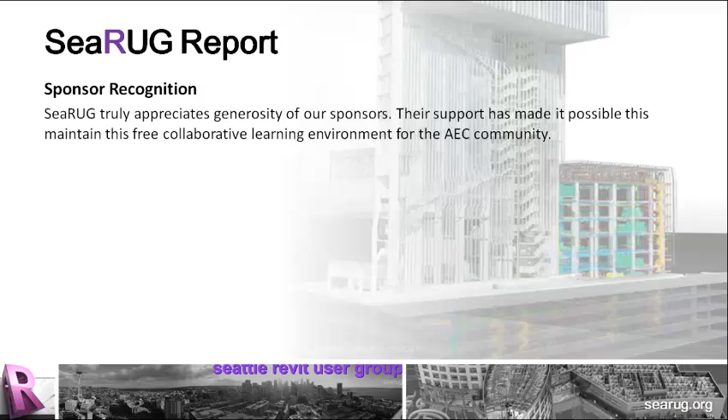How's everybody doing? Good. Does everybody know who PPI is? Show your hands. Now, who's had a presentation with me before? Show of hands. Okay, because you're going to hear this word a lot, show of hands, today. That's pretty much my presentations. Can we get the front lights dimmed just a little bit more?

Excellent. So here's a couple little brag points about PPI. One of the things that we do have is what we call a Revit briefcase. Last time I was here, I kind of demoed a Revit briefcase, which is a bunch of little tools in Revit. We do have a new release of that, and if you want to check out the new stuff, you can go to our website and just watch the video of the new release. I'm not going to show that here today.

Who's using release 13 right now? Show of hands. Anybody using release 12 or below? A couple folks. Okay. Now, Rob talked about 14. 14 is shipping, so the 3 flavors all by themselves are actually shipping. I think it shipped last week. So you can download those if you wish. But the suites are not. The suites were supposed to come out the 12th, so figure in the next couple weeks we'll see those as well.

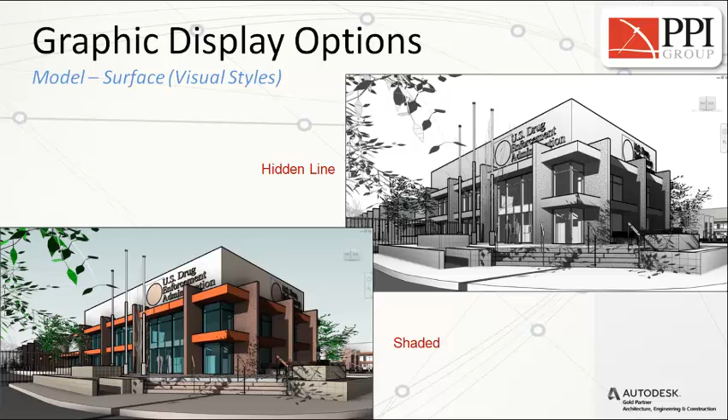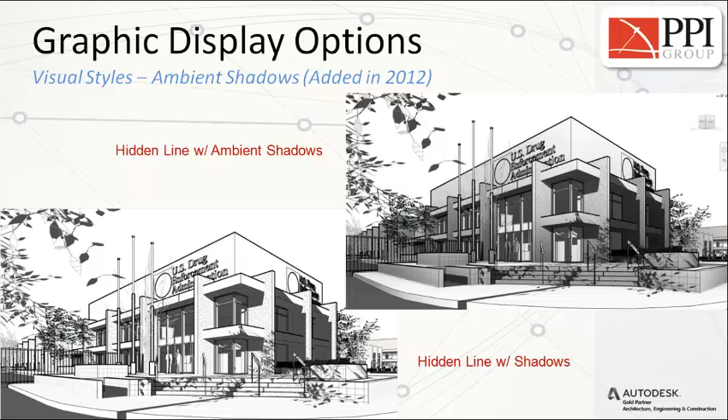Visual styles, hidden lines, shaded views, realistic, rendering. So in the realistic or the visual styles, we actually have ray tracing, which was a 13 tool. How many people here are using the ray trace tool right now? Okay, not a lot. Okay. But we also have ambient shadows. Shadows by themselves, but also ambient shadows are inside there as well. How many people are using ambient shadows? All right, so new to 13, we have the ability to apply background images to elevations and sections.

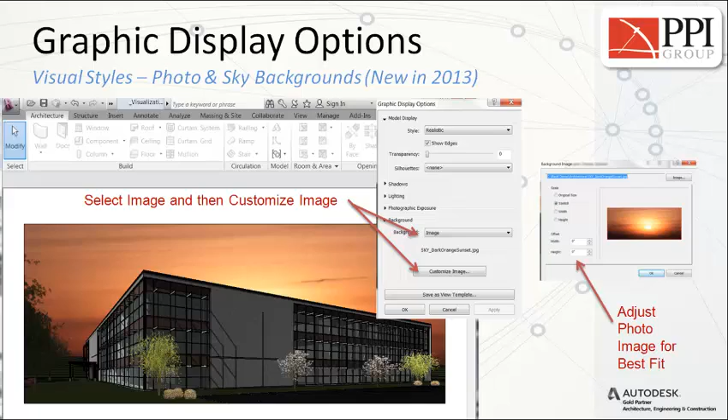But we also have the ability to add images to those as well. There's a couple little things in 14 that I noticed about the images, that when we go off and place them, if we tweak the image a bit and we want to go back and tweak it, we've got to remove the image and basically do it again. So I don't know if that was a 13 thing, but definitely in 14, it caught me a couple times during my presentation. Let's talk about shadows and lighting. Do you guys like that picture?

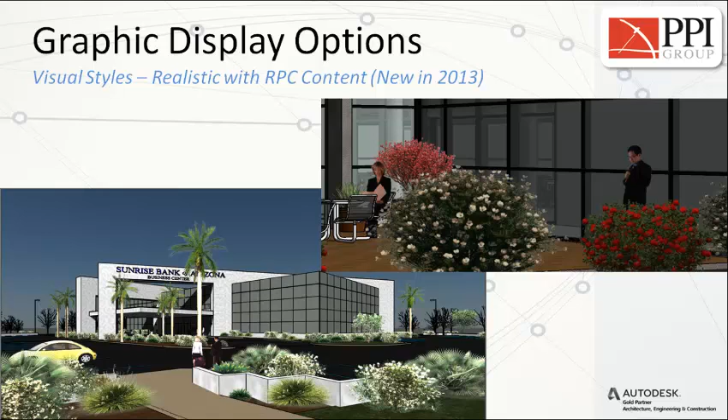In the 2013 version, any of your RPCs are now rendered in realistic. Realistic is a pick of a button and a couple seconds versus a render. Very powerful.

All right, let me show you some things. This is 14, as he mentioned, the big R.

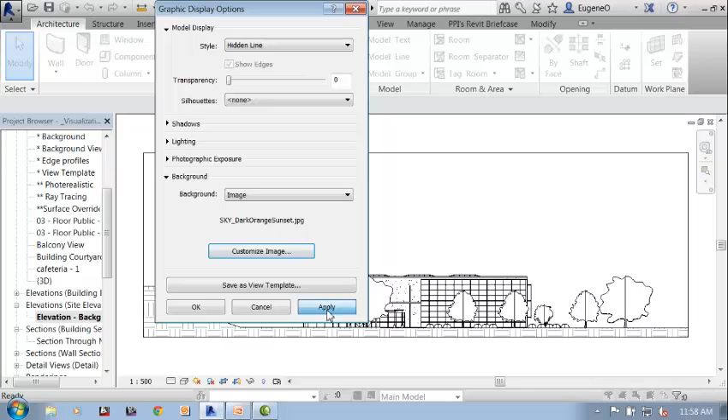All right, so background images. If I go down to my visual styles and hit the graphic display options, we have background images. I can say that I want to grab an image. Let's customize the image, let's go grab the image, let's grab the orange sunset here. And then when I say OK, I can go off and apply that, and there's that image to an elevation.

And then I can just quickly say, you know what, I want to go realistic to that as well. There's your seconds - pretty quickly to get our trees, to get the shadows and all that stuff automatically set up. How quick was that? Quick.

All right, let's take it a step further here. How many people have dealt with and played with these options here? Show of hands. That's good, that's good. So first off, you got your visual styles - which one do you want? I'm going to go and say I want realistic for this.

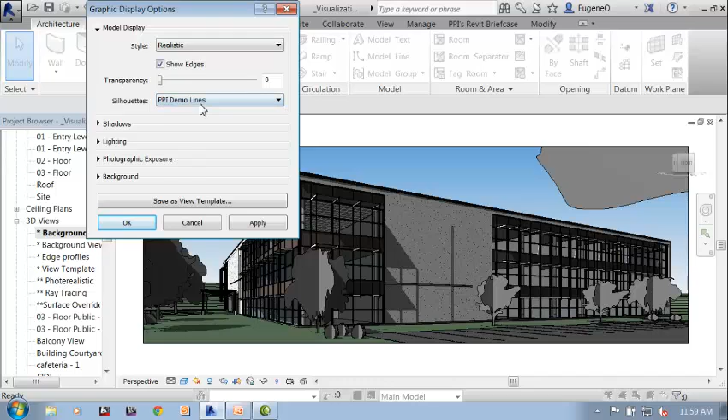And then there's those edges right there automatically turned on, and here's our silhouettes - which one do you want? I'm going to make it really ugly with our PPI demo lines to start off with. I'm going to go and say apply. And we're going to get some really pinkish things happening, just so you can actually see in the back row - but that's applying those profile lines.

So you think about what kind of line weights do you want to assign to these edges, and you can apply that by creating a line style.

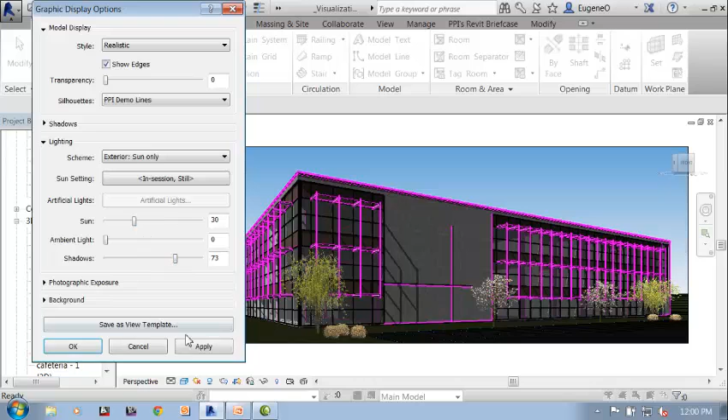And then we can drop it down to the next step here and go to shadows - there's your casting shadows and there's your ambient shadows. If we do have shadows, I'm going to go and change my lighting here. So let me pop up there and say I got shadows go on. There's my lighting, and you can kind of see the shadow right there. I'm going to say, you know what, let's boost that up a little bit, let's apply that. So really what you're doing is you're adjusting these lights to get your look and feel.

And of course you can play with this all day long, right, to get there. And then once you have that, then you just go down to the next thing.

There's photographic exposure - this is something that we got in 13, before we had to do it in render, and all you get is the render tools. So I'll make sure to turn it on with an automatic feature. I'm going to go ahead and say let's apply that - kind of washes it out a little bit more, kind of brightens it up. And then I can go off and do a manual tweak to it.

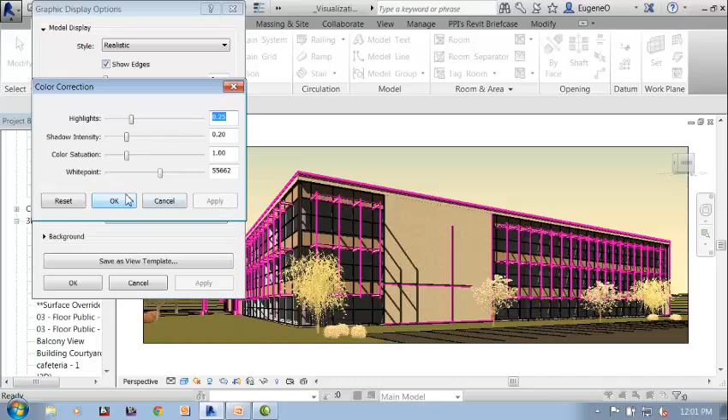Or I can go in and do some color correction, like I really want it to be a yellow instead of a white. Cool, so again we're just playing with these things. Once we have these done, we can go again and throw in a background image.

Let's go to a different one here. I'm stretching that one, that looks good. And let's apply it. And there it is.

So now what I've done is set up a view that I kind of like - not really, but I kind of like. And once I have this tweaked, what can I do? I can create a view template of this. So all I have to do is just click onto it, give it a name, and OK it.

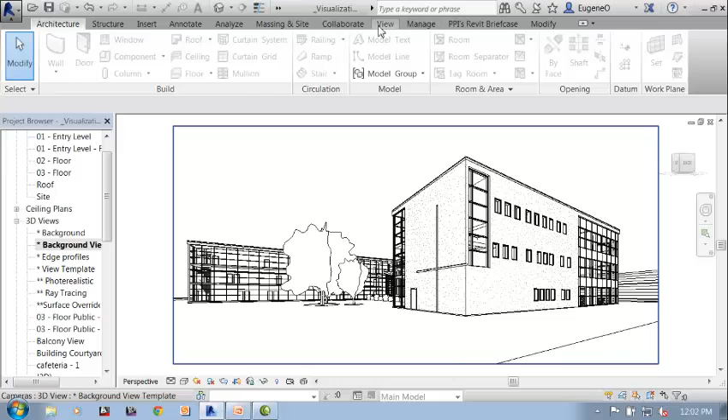And then I can go to another view and I can apply that template to this view. Simply by going over to the View tab, saying Apply Template, grabbing my template, and applying my template. Not really great with the sun, but we're going to talk about temporary templates a bit later on today.

For those people who are using 13 and View templates, do you like them? Okay, some people do, some people don't.

The thing about View templates in 13 is once you applied it, it's locked, if you assigned it to the view. So right now it's not assigned, I just said apply this template. If I go look over my buttons here, I can change any of these little buttons—oops, wrong button, I want that back on.

I can change my path and say, let's look at this at maybe 10 o'clock in the morning. Notice the actual shadow changed, but I applied a template to it.

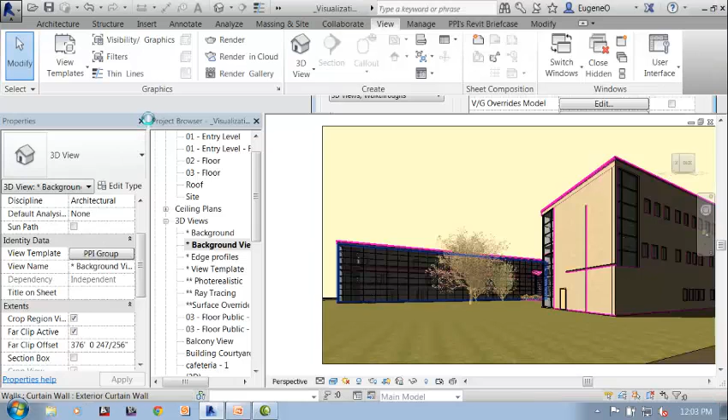Now if I go over to my properties window, which I turned off for the screen size, there is no view template assigned. If I assign this view template, what I'm basically telling it is I'm locking that information down.

Went back, shadow went back, and then these buttons are pretty much grayed out now. I'm not really allowed to go change these buttons. That's a view template. All my little buttons there. Here we go.

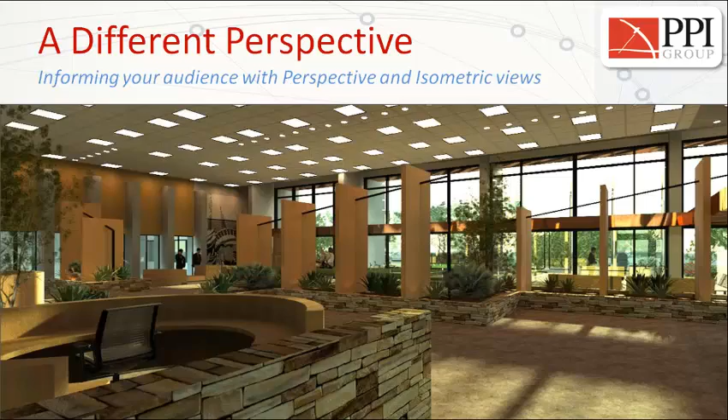Different perspective—I'm not talking about just camera views, I'm talking about isometrics as well. How do I do this in Revit? Not the animation, creating those types of views. Anybody? Not Chris. Section boxes, okay?

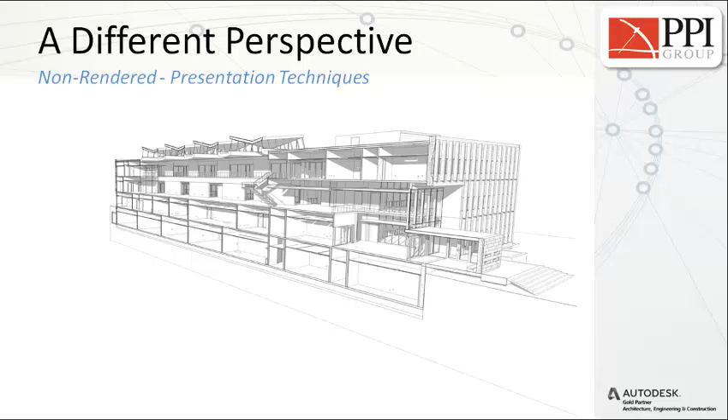So who knows how to manipulate a section box? That's a tough word for my Irish tongue. Okay.

How about orient to a view? Basically what we're doing is cutting a section in this case and orienting an isometric view to that. In the 13 versions, if we lock the view down to new functionality, we could actually tag or label that information. In 2014, we can use material tags now.

When you're creating your images, put yourself in there. How are you—when you walk into this room, what do you want your audience to see? As a presenter, I'm going to be looking up here. As a user, I'm going to be sitting in one of those things, looking down or looking at the projector, right? So think about that.

When you have a balcony, you want to look over the balcony and you want to look at something on the balcony. If you have a residential downtown, a couple of the high rises here, and you're looking out in the city, wouldn't it be nice to have a picture of what that person is seeing? An image of the background, an image of that?

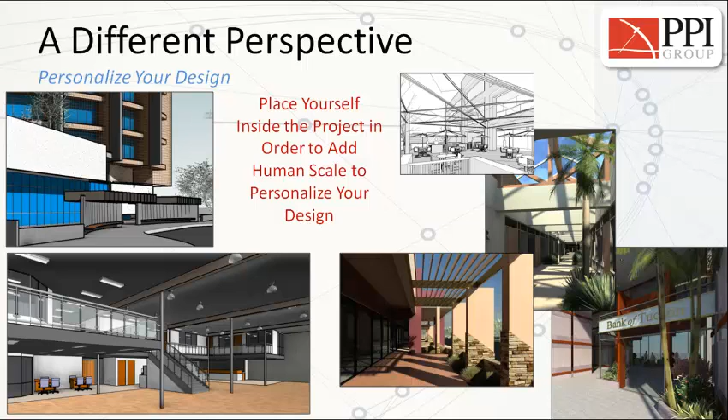When we render, we have the ability to also add images to our renders. Now the projector is not going to do this next one justice, but not a lot of people are doing nighttime renders. But it tells a powerful story.

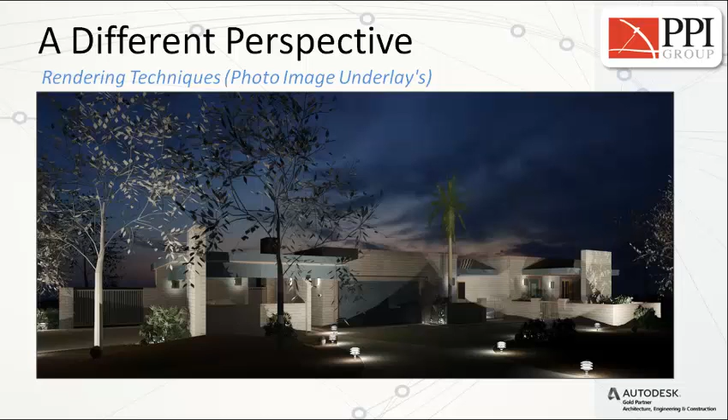Think of this one right here, that one right there. That right there is an image. Just basically somebody went out there, took a snapshot of what's going on in that site, and put that image in the render, or put that image in the elevation, section, or isometric perspective view.

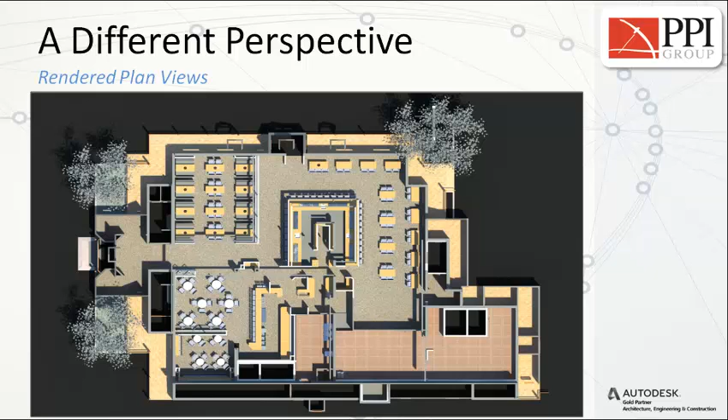Tell that story. How many people here have actually rendered a floor plan? Not a lot. That's a powerful thing right there. Very easy to do.

Gone are the days of our old CAD cover sheets, or at least they should be gone. Okay? Tell a story—that's what that cover sheet's about, right? It's not just information, it's a story, but it's also the image that you want to present.

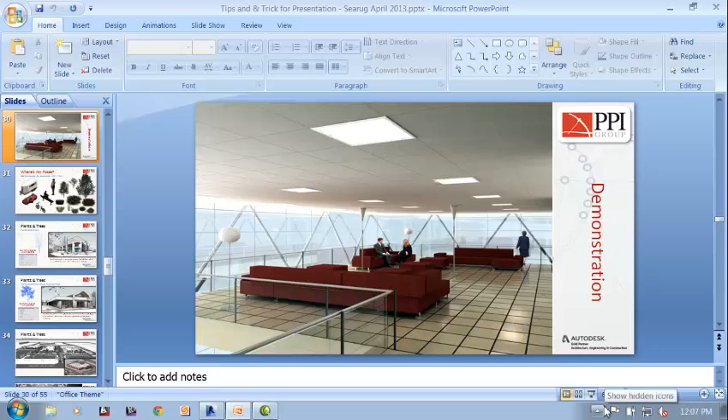Let's start off with that floor plan view. So best practice: start with your doghouse view, which is what I call that right there, the default view, because it looks like a doghouse. Right-click it, save the view, give it a name, give it an appropriate name. 3D Ortho 2 is not a great name, but I'll leave it there.

And then what? You're going to right-click the cube. I'm going to go and say Orient to a view. That's a floor plan view. Which one? I want the ground level.

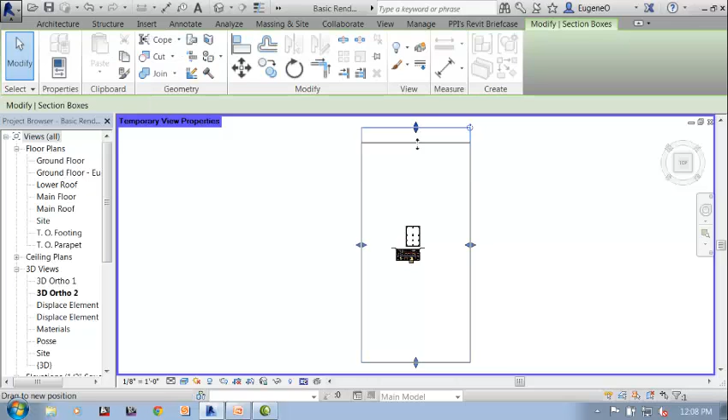There's my start. I also have a view template that I've created, but I'm going to use a 2014 option—it's called a temporary view template, right down in the bottom here. Let's look at this floor plan rendering one. What it's going to do is actually close and hide a whole bunch of stuff, turn on realistic, and then I'm just going to basically crop out my views here.

And there's that floor plan in realistic view. Now again, it's not really giving it good justice on the projection screen versus my screen, because the resolution isn't great on the card that I have here. But what else can I do here?

Come back to here and start playing with my settings, maybe play with my shadow settings. Let's go to lighting for that. Maybe adjust that a little more like that. Maybe get the sun a little higher, lighten it up. So I can start playing around with these.

And I started off with a template, and now I can actually create another template from this. But this is not a render. All I have to do is hit the render button, right?

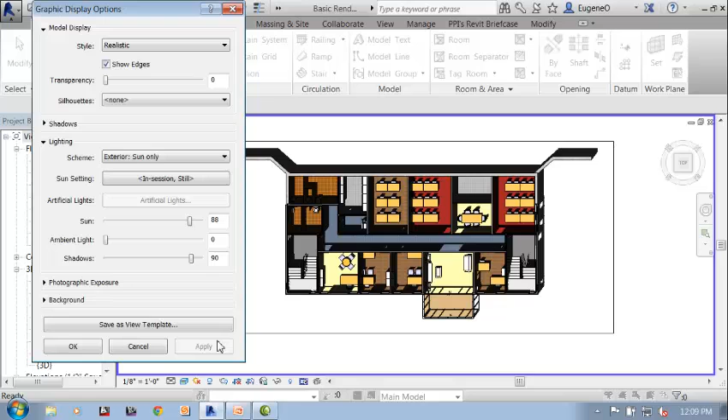Too far. There we go. And I'm just going to go and turn on my ambient shadows. Shadows, let's go and cast some shadows. Let's do ambient.

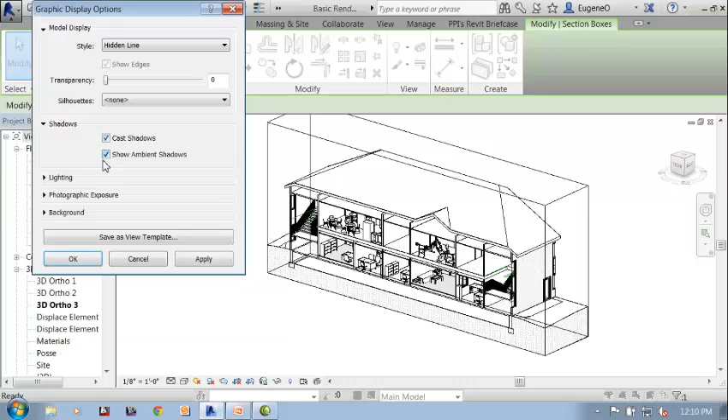I'm not liking that. What's going on there? Let's look at the light. I'm in my session here. Let's go ahead and create a still. Let's grab a predefined still.

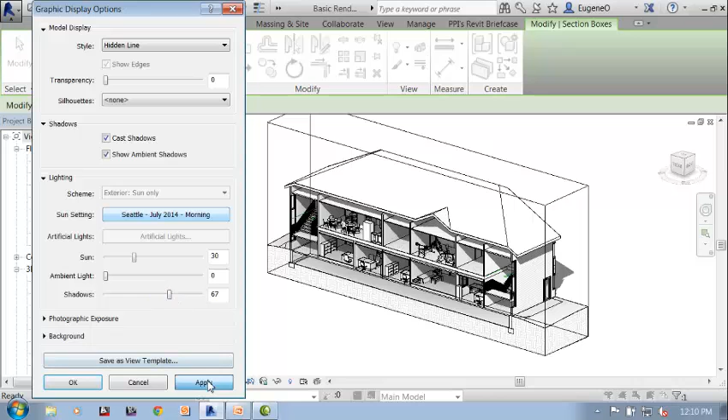That's what I'm talking about. And then start adjusting to your look and feel. Cool? Yes, no? All right.

So how did I create that other image? What did I do? Basically, I just saved this as a snapshot, and then what? Just moved it, saved it again, moved it, saved it again. And then PowerPoint just did the actual play for me.

So if I just go shadows off, is what Rob's asking. So if I go off here and say, you know what, I don't want that, I just want that. There we go.

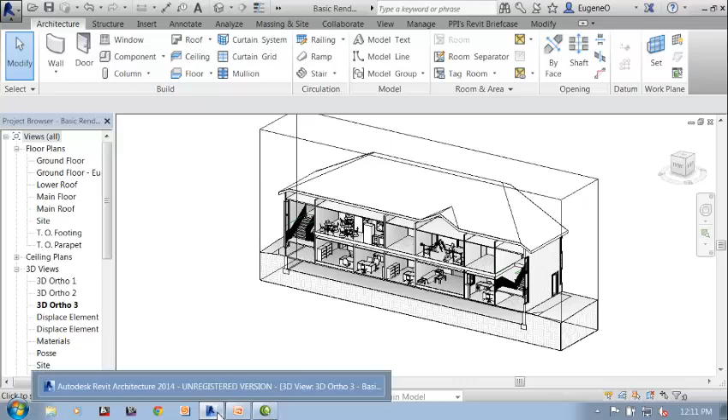All right, by the way, all the pictures, with the exception I think of 4, are rendered in Revit. This is actually like 2008-ish or 9-ish or something, which was AccuRender at the time.

Where's my Posse? Right there, actually. Trees, bushes, cars—this makes the render, not just the materials, but the stuff in there. Just like a photo. If you're taking a photograph, it's all the other stuff that's happening—it's the garbage cans, it's the drapes, it's these other things, right?

Who uses, is it ArchVision? Is that correct? Who's using ArchVision right now? Who's heard of ArchVision right now? Okay, go investigate. ArchVision is basically another product that has RPCs. So it's a product that you can get RPCs from.

I'm going to concentrate on trees because I have limited time. That's a 2009 tree—you guys remember those? Actually, I kind of like the old trees because when you render them, they had different seasons and different stuff. But think about that now—when we are doing these things, we do want to talk about trees that don't have leaves at different times. So when you're rendering, you're not just rendering today, you're rendering the seasons as well.

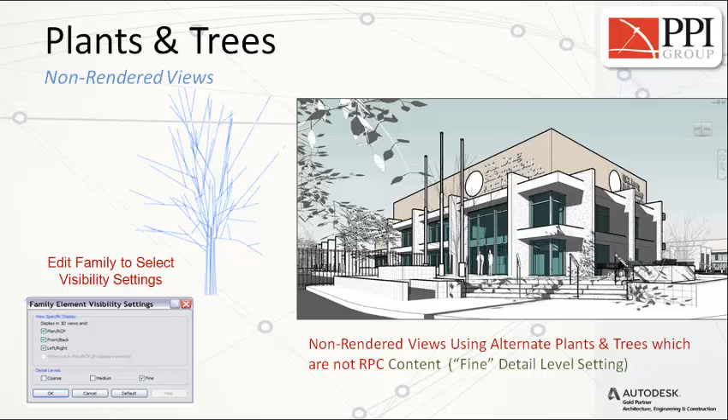But don't forget about trees that actually cast shadows. Go find some of those trees. They may be a little big, but how many trees are you going to have in your view? They may be, but it's going to be worth that casting of the shadow.

When you're looking at your sites, remember to put that stuff in your sites. How do I do the road sign? How did I do that? Somebody said 3D text, right? Model text. Model text. That's all.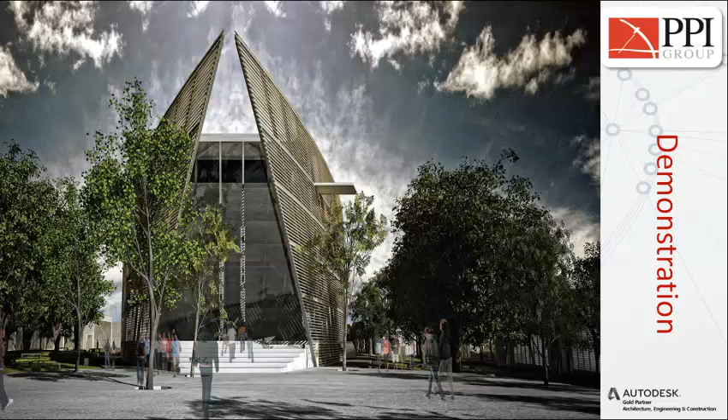That's a 3D Studio Max render. All right.

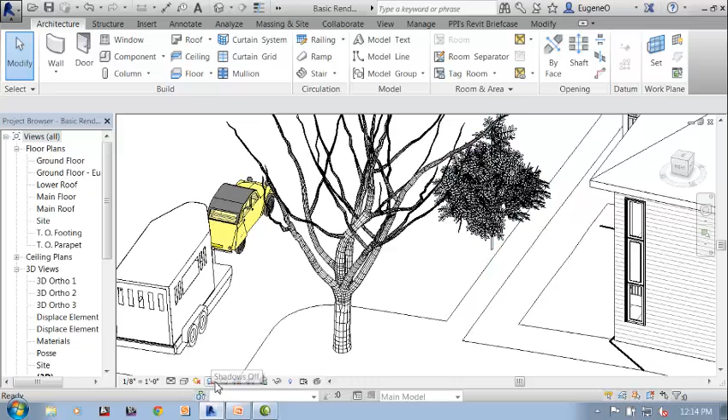Let's take a look at some of these trees here. Pull that one out a little bit. So these are kind of AutoCAD-ish trees, and they actually do render pretty well, and they do cast shadows very well.

We got kind of a creepy looking Halloween thing going on there, right? So that's kind of a dead tree because it doesn't have any leaves, so that'd be great for winter, right? What's that? Yeah, it is kind of hovering, yeah. I just threw it in there last night—I didn't worry about the height and stuff.

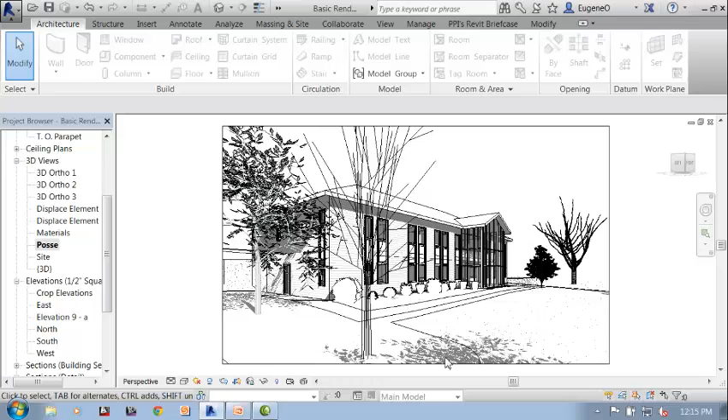So here's another tree, and that's the 2009 tree. If I throw in some shadows right now, you can see I'm getting nice leaf coverage, and there's a tree behind me that's actually shadowing this as well. At this stage of the game, this is pretty good, but let's say I want to boost up this level and add an RPC to this particular tree.

So I'm going to flip over to hit my Edit Family button. I'll grab onto the tree, and in the Properties window—oops, not the tree, the actual view—I want to come down here and say the render appearance is going to be third party. And there it is.

So now what I'm going to do is say this particular one is going to show up in coarse and medium, but not fine. And this one right here is going to show up only in fine. This is stuff we can do with families.

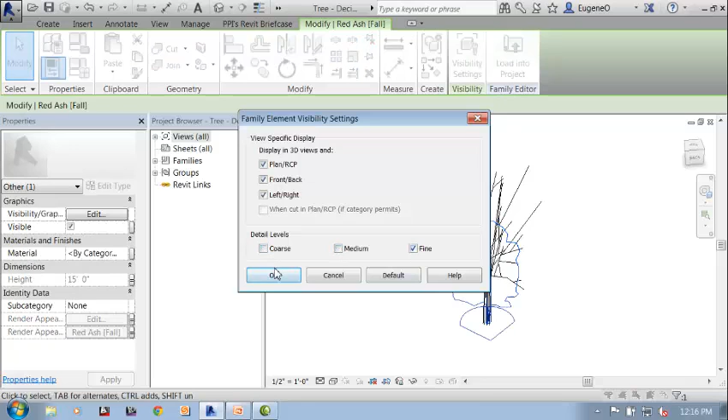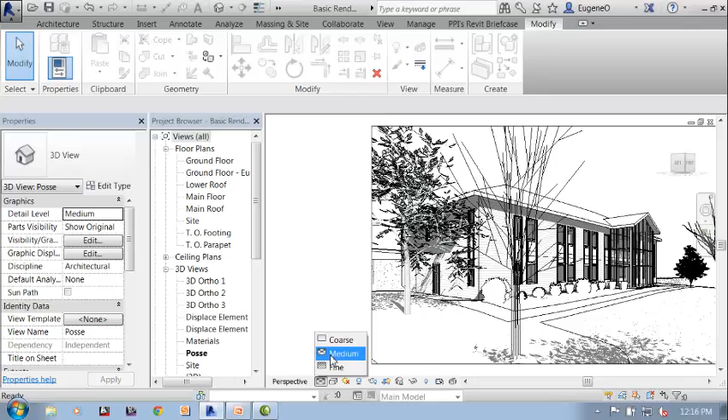Go ahead and I'll load it into my project, overwrite it, go back over to here, close that down. Now at a medium level of detail, this is what I'm seeing. And at a fine level of detail, that's what I'm seeing. And if I go over to realistic now, I will get the pretty picture.

So see what I'm talking about when I talk about staging different times of your renders? Maybe at this stage it needs to look this way, but at the end of the day, end of the project, we're going to have some real pretty pictures.

Everybody's quiet, I'm not hitting any questions. All right, let's close that one down.

This is the fun part for me because you guys get to answer the questions. This is a hidden line view. How do I make the bottom look like the top? And again, Chris can't answer the question.

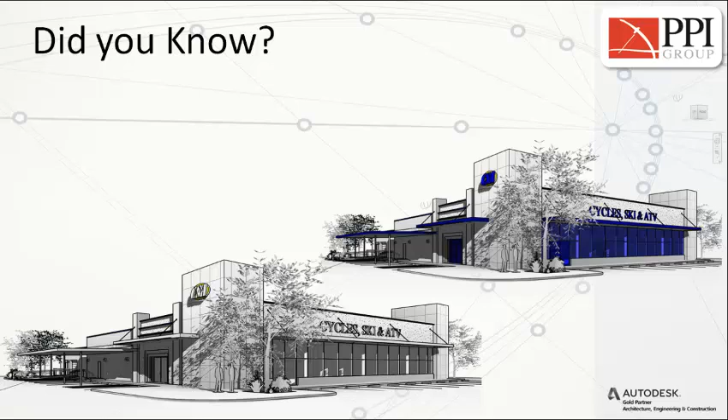Surface override. So basically what I'm doing is overriding a particular feature in a hidden line view.

Let's take that a step further. Here is a typical elevation. But wouldn't it be nice to be able to give it some depth, some texture? Because when I plot that out, I kind of want it to look like that.

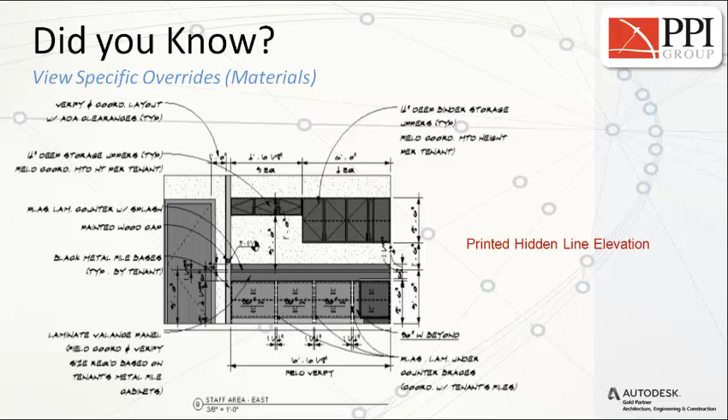I've done some sun today already. So everybody knows about the sun? Sun studies, but we can also do what with it? It's for rendering as well.

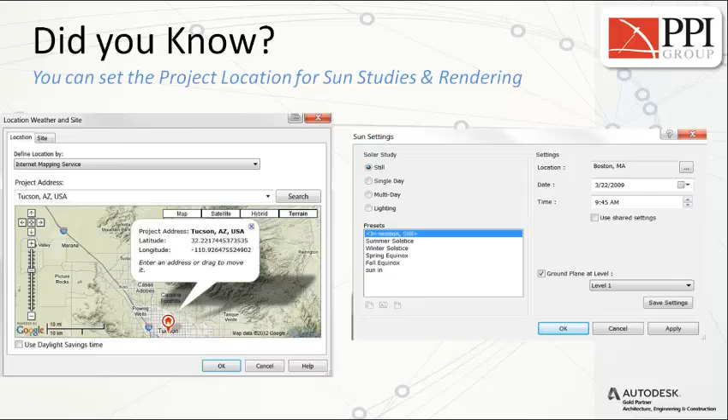What's one of the most important things to make sure is set if you want to get an accurate study and accurate shadows? Location, what else? True north. Where is true north? Who knows how to do that? Okay, I guess I'll show that one.

Think about your sun. This is basically the same camera view rendered 4 ways: sunset, midday, sunrise, and nighttime. All by setting up the sun, and of course in the nighttime, setting up the artificial lighting.

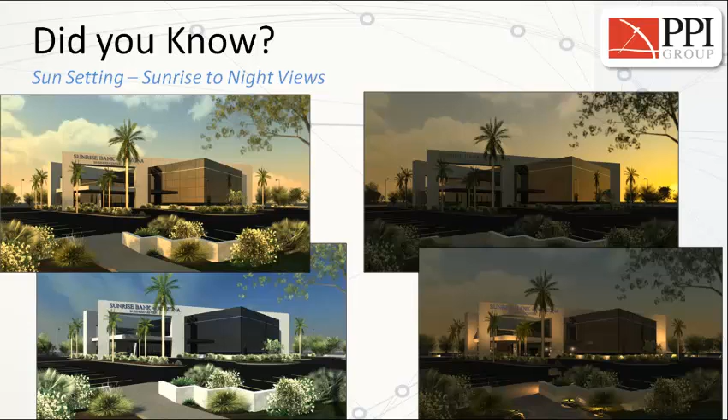Who knows about transparency? Everybody should show their hands on this one—this is like the key one. Good. Who knows how to do that?

Put this on a sheet of paper, and I want to show elevations, and I want to show a gradient fill on a sheet of paper. Two different ways to do that—there's a 12-way, and then there's a 13-way.

Anybody? All right, we'll show it. Rob mentioned render to the cloud—I have a ton of credits.

Okay, now I have a ton of credits because we're an ATC. And as an ATC, we have 50 licenses per site, so I have a lot that we can use. But there's telling you the credits, and I'll go look at the actual maximum image size so we can look at that as well.

But this is something that if you have subscription, utilize it if you have it. Do you want your machine to sit there and take off rendering, walk away, or would you rather it render to the cloud and still use your machine? That's what it's all about.

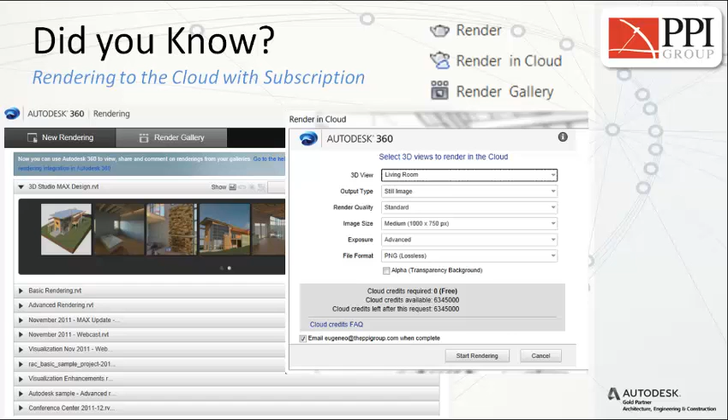So for subscription users, you have this ability. In the 13 version and on the suites, you have this workflow option that I didn't talk about last time I was here because it wasn't shipping at that point in time. And Autodesk promised a one-click thing—it's really like 3-ish or more clicks. But this right here is something I got out of Max.

So Max is not just huge, pretty pictures. This is a 9-click thing in Max.

Now you can go, well Eugene, I can do that in Photoshop. Well, yeah, you can, but this is dynamic. If I change Revit and I do the workflow properly, this will update as well. Can you do that in Photoshop? No. So that's part of the suites, that's part of the idea of the suites. And if you set it up right and you do it right, then it basically is kind of one-clickish once you get done setting it up.

Don't forget about design options with rendering. Here's four different options for the client on that curtain wall system. I can't remember who the client was on this one—I have a PowerPoint that shows all the client names for these pictures. This is huge, a lot of work, but actually the curtain wall itself wasn't a lot of work because they had a bunch of parameters and adaptives and all that good stuff going on. But that tells a story, and they get to choose, right? Hopefully they don't choose A and then five weeks later choose B. Never happens, right? All right.

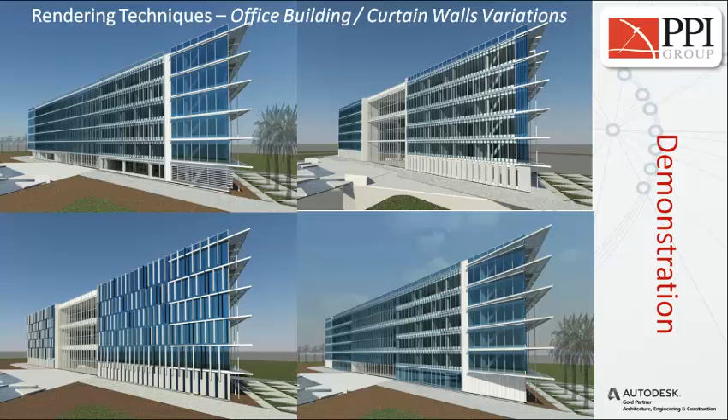All right, let's start with the sun. Probably should bring this up. There we go.

All right, so site plan. In the site plan, what are these right here? Go ahead, Chris. Project base point and survey point. That's very important for where north is, because it's all keying off of where your points are.

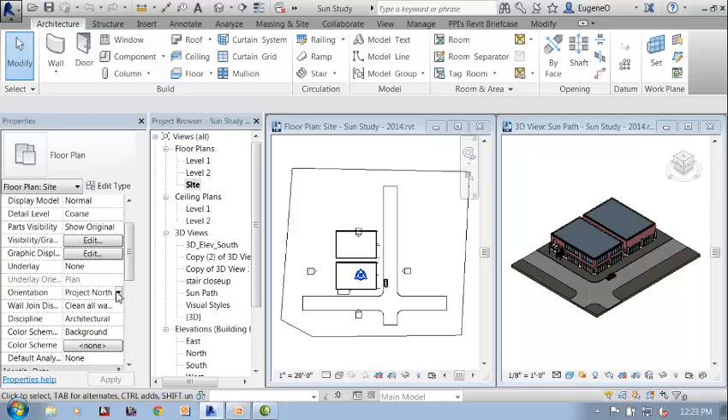So if I come over here and say, well, it's not project north, I want my site to show true north—when I come over here to the Manage tab, I'm allowed to go into my locations and rotate where north is. But before I do that, let's turn on a little shadow here. There we go.

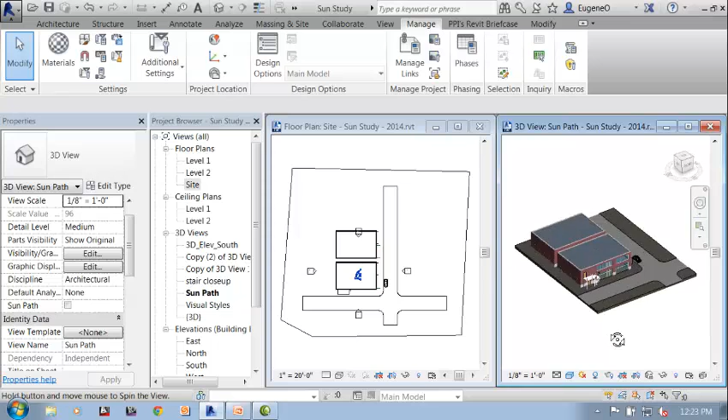I think that shadow's in the background there. So I'll come over here and say I want to change my project north, or rotate true north. See, it's keying off of where that point is, so it's important to first position it. There's north—this is where I want north to be. Notice the shadows are adjusting based upon that. So one of the first things we want to do is figure out where north of our building is, and then we start tweaking it.

The floor plans are not moving because they're set to true north, or project north, which is straight up. So just the site plan is moving around, but anything rendering or showing shadows is casting based upon that north.

This is one of my favorite ones. Basically, if I just want to add a color to something, I'm going to tab to it. Let's get one of those panels there—so we have solid panels and glass panels, and I'm going to override by the category.

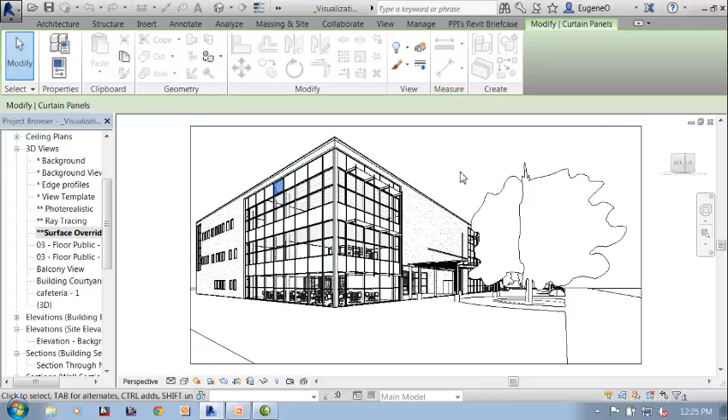So right-click and override, element, category, filter. I'm going to say category, change the surface pattern, get a little darker blue there, and then choose a solid fill for that. Okay.

There it is. So it's a hidden line, but I want to show something a little different versus using shade or consistent colors, which is all the cartoon colors. Here I'm saying I want a cartoon color just for this specific item.

Right? So taking that step and applying it to elevations.

So again, why is this doing that? Anybody have an idea what's going on? I haven't done any overrides or anything—what's happening with my wall? So if I look at the actual properties of the wall...

Coarse scale, there's my pattern. So if I say, well, give it a little darker gray—there's the darker gray. Okay.

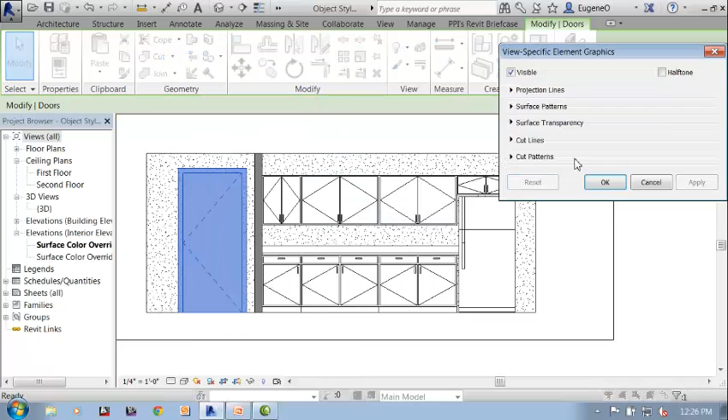And again, I can take, let's say, the door—let's get rid of that—and go ahead and do the override on the door. Oop, not category, let's do it by element. And let's give it kind of a brownish color.

And there's the door. Then I can go into, let's say, visibility graphics and set up some filters for the other stuff. I already set up a filter, but I'm going to show you how to do one here real quickly.

But what I want to do is just go into my colors. Let's say I want a brown, make that solid—let's make this orange, feeling more in a fall mood. Let's give this one a little gray.

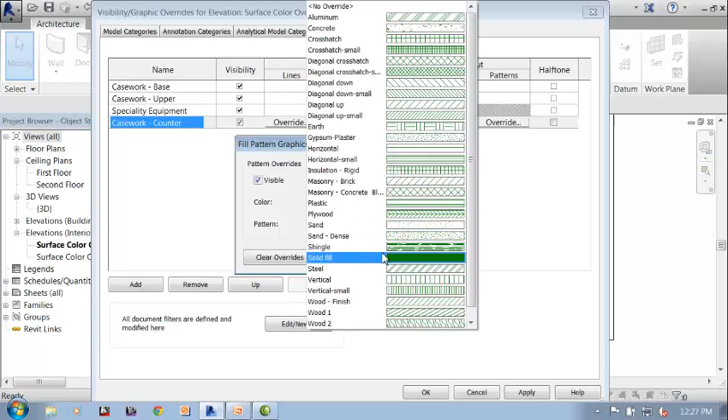And being Irish, let's give it a little green. There we go.

Pretty quick—render that or plot this to halftone, right? Apply this as a view template, or create this as a view template.

So let's come over here. Let's go ahead and say, let's create the template from this one. Okay.

And let's come over here. So right now, if I go off and say let's apply that—why didn't the door change?

Excellent, because I did element, not category. If I would have said category, then the door would have changed as well. But let's say in this case, I want to take the door and the wall and give it a little bit more depth.

Basically give it some more outlines around the actual lines themselves. Now I could do this in visibility graphics, but I want to be able to repeat this, so that would be a filter, right?

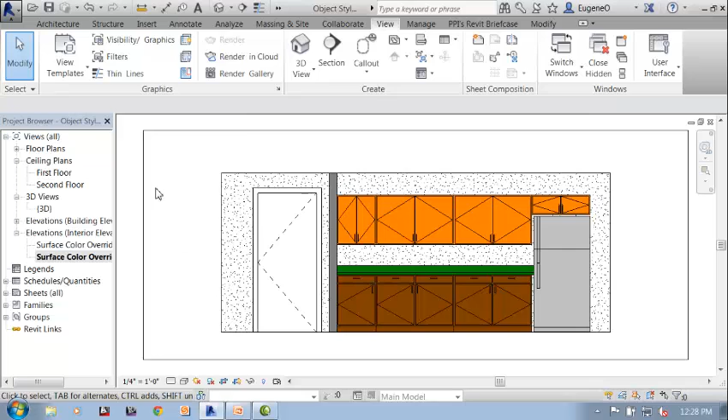Or a template, okay? So let's do a filter. So there's our filters. I'm going to add a filter. What do you want to call it? Or new, and then what do you want to call it? Well, let's keep it Filter 1.

And then I'm using plain Jane Revit architecture, but I still get all of these other options to uncheck. So even though I'm using the suite or not the suite, I still can uncheck those. I'm going to say that this is going to be for doors and walls.

And over here, I'm going to grab a filter by and a parameter, but I haven't created the parameter yet. So I'm going to say, well, let's add a parameter here. And there's none there, so I'm going to add it, and I'll say walls and doors.

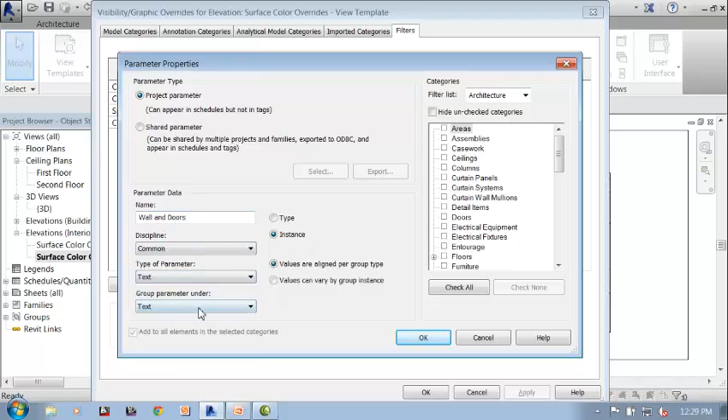I'll make it an instance, put a text, and I'll put it in the other category. And then it's going to be assigned to doors and walls.

Okay, so now what? I want to give the lines a little fatter lines. Oops, wrong side of the box.

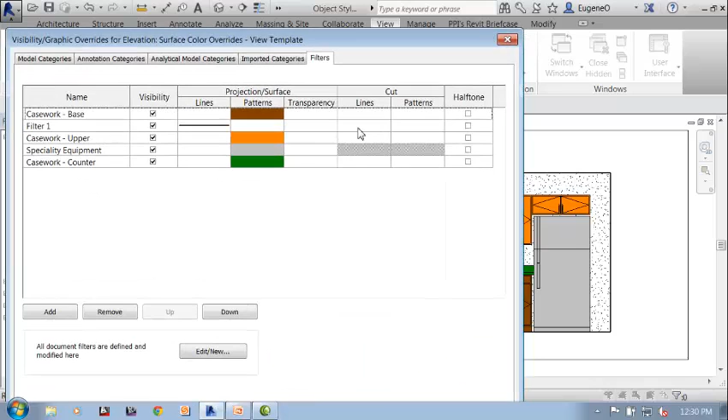When I apply that, what did it do? Give them just those. Now I didn't do that one, so to get the wall, what would I do? Give you a hint. So it's cutting. I'm cutting the wall, so I come over here and add it to the wall.

And now that wall's popping out. That is a filter. And there's a way of assigning, instead of using the silhouette, which you would have done, what? All lines. This is just narrowing down particular types of lines.

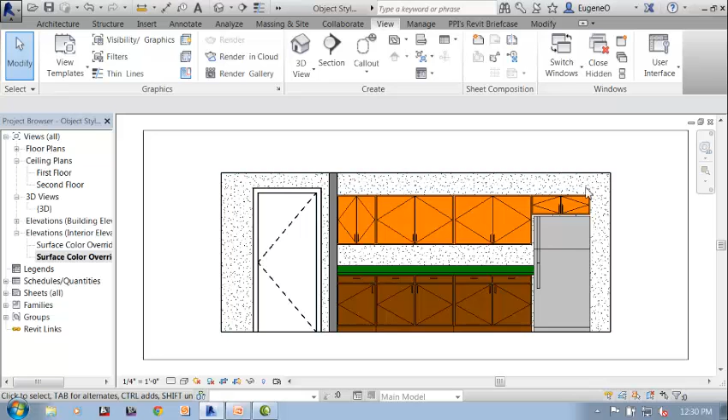All right. Any questions? We having fun? Everybody's quiet.

You have all of Max. So really what it's doing is bringing your file into Max, and you have all the Max capabilities that Max has. Back off where you showed the floor plans - oh sure, here, and it's all colored and rendered.

So can you apply like legends, color scheme legends over room? No, because it's a 3D view. So I would have to do that in a floor plan view, which I could. So I can just do it in the floor plan view and add some shadows and shading to that.

All right, I know everybody's waiting for 14, right? What is that? I have no clue what that is. Anybody know what that is?

But that's the splash screen now. So when you launch Revit 14, that's what you're going to get. That little splash screen, that's what you get. It's like, okay, all right.

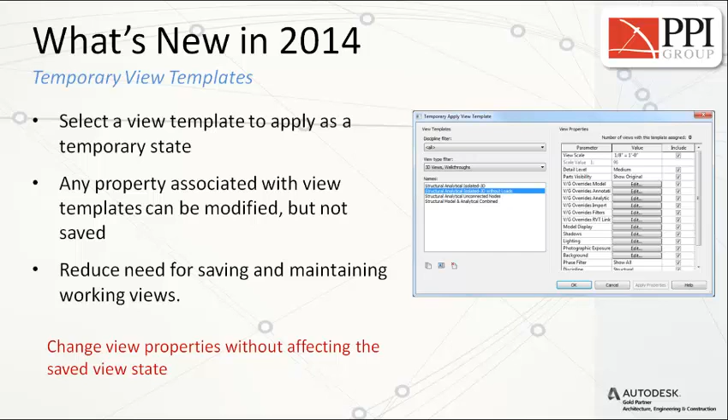So we talked about view templates. So it's a temporary view template is what it is. So think of that as like hide and isolate temporary things. So if I close Revit down and restart Revit, it's going to go back to the original one. Okay, so it's kind of taking on that same look and feel to that.

We have a new material box now, once again. But on this particular one, I've noticed that on the machines at our office, that we have a whole bunch of different ones we tested on, that it's not crashing. So for those people that have had the material box kind of crash on you because it's got those two little boxes happening, I haven't seen that happen in the newest release. Anybody else seen those issues on theirs that have been playing with it?

Okay, there's a different little process. I'm going to show you how to work around that. And then we have split elevations. So think of split elevation just like a split section. So taking a section and splitting that line, we can do that to elevations as well now.

We could also have irregular or non-rectangular shaped callouts as well in 14. Very cool. Yeah, but there's always that but caveat. When we say right click, orient to a view and grab those, it's still going to be a box shape. It's not going to find the irregular shape or the crooked shapes of the 3D isometric views. But I do know they're working hard to get that in there, so we'll see how long it's going to take them.

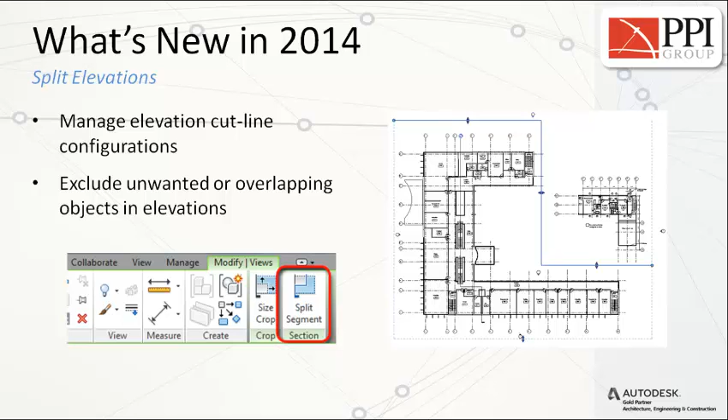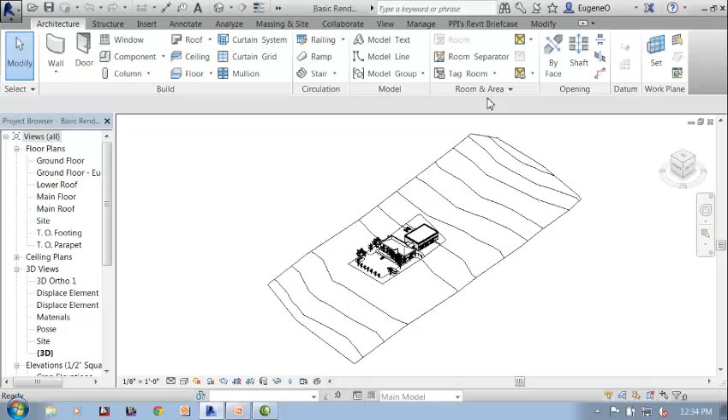All right, so let's talk about the material box here. And I haven't found that they've moved any buttons either, so that's always a good thing, right? Buttons don't move around. So there's our out-of-the-box material box. So we don't get the two things happening anymore, kinda. We do have this little button right here that goes into basically the physical and the thermal, and it goes into the asset section of the box.

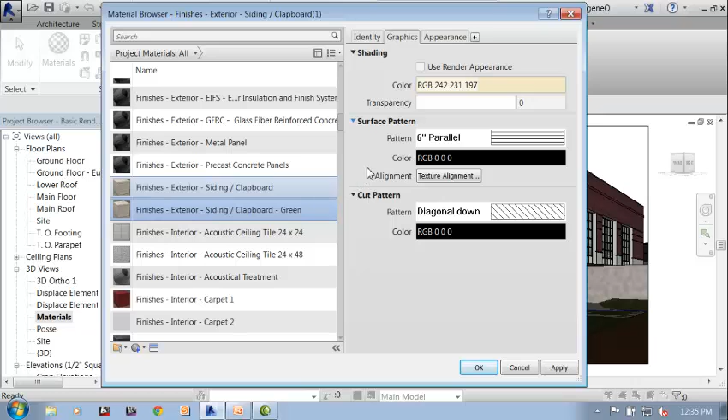So what I'm going to do is scroll down here and look for clapboard. So I'm going to duplicate that one, give it a name. And then over in appearance here, we have this little asset option right here that if I change the material, it's actually going to change both of these. So what I'm going to do is make sure I'm in the right one. I'm going to make a copy so I have a different one now.

I'm going to go and grab my little button there to go look for my material. This is the one I got off of Hardie board. Basically just had a little JPEG of it, just took a snapshot of that.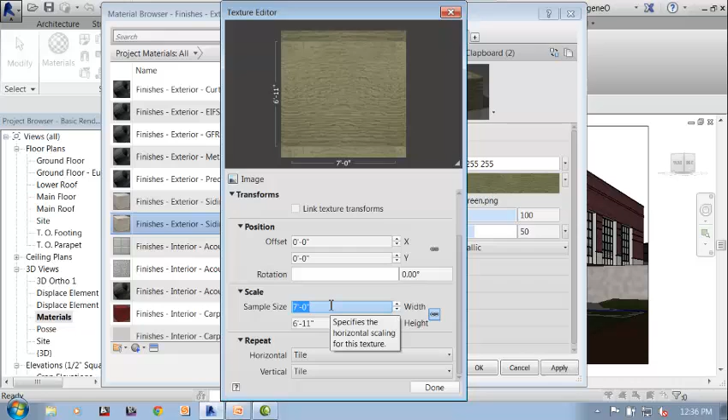And then this box has changed, so you have to watch about this box. I've noticed different times that it changes in the look and feel of it. I haven't figured out what's going on, maybe because I have a different version happening. But sometimes these numbers come off with metric numbers versus feet and inches, and I haven't figured out why, but it's done that. So I'm going to unlock that and say that this is actually 12 feet, because I can buy them in 12. And I want to show the 6-inch exposed for that.

Cool. And then I'm going to say OK. OK it. And then this is not really a great idea for painting, but with lack of time, I'm going to go and use the paint tool. Grab that one. And notice the picture hadn't changed, and it could be my video happening there. But I'll paint those two. And that was a quick example, basically taking an image from a site and using that image as a material.

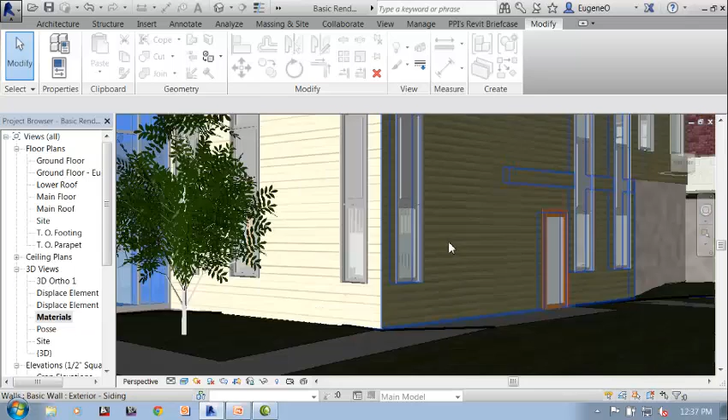And if I zoom close, there it is. Now I've got some off lines going on there. So if I go look at my material and I look at the graphic side of things, there's my 6-inch lines happening. And I could actually take that and adjust these lines to match - I went the wrong way - to match the rendered lines.

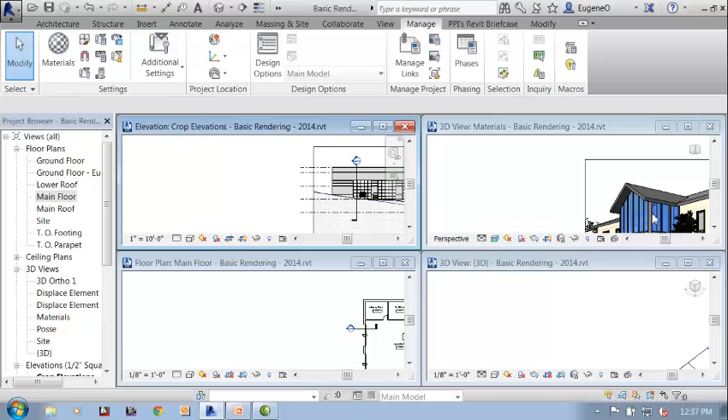There we go. All right. Let's get rid of that one. That one.

All right, so on this elevation, you can see I got the cars and they're kind of floating again. And there's my elevation right here. So if I pick this elevation view, now we have an option to split the segment. So when I go and click onto that, where you want to split it, it's just like a section view and where you want it to go. Automatically split it, got rid of my cars. Of course, I could have hid those, right?

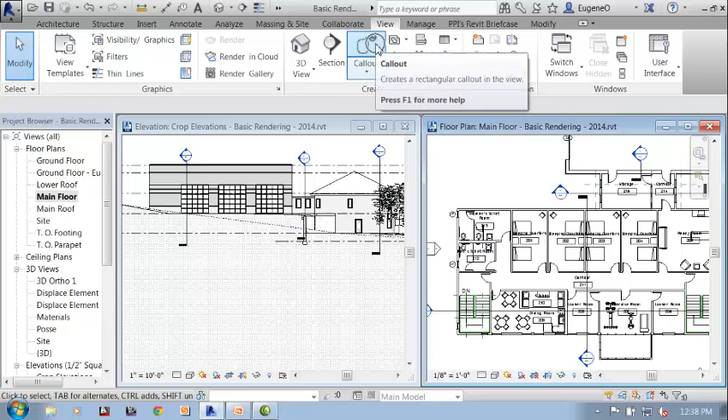Okay, but think about sections, think about elevations, and let's do a quick callout since we have a little bit of time. View, callout. What kind of callout? Let me sketch one. And I'm thinking, I want to go this way - I don't know why, just feeling the need. There it is. There's my bubble. There it is.

Very cool. Now, again, it'd be nice to be able to create a 3D isometric of that, but not yet. Almost.

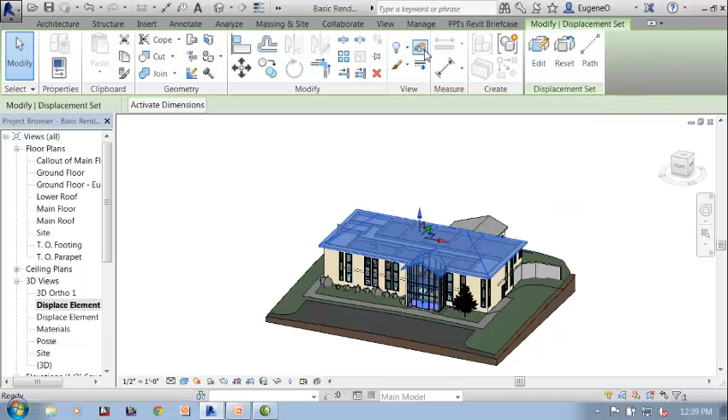All right. And the favorite tool out of 14. There we go. All right. Pick my part. Displace element. Grab it, drag it up. There it goes.

Pretty slick. Now, there's a couple other things here as well. Let me get a little closer to it. I can go and say, I want this one, I want this one. Get in there. That one, I want that one, I want that one. And I want to grab those and drag them up.

Oh, but I forgot those. So when I pick it, we can edit those. And then I can go and add those. And look what's happening as I add. Very cool, huh?

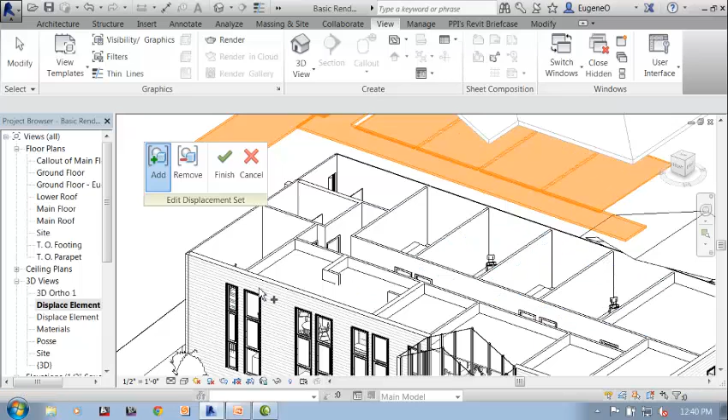Now I can grab, like I said, multiple things at one time, grab those up. Who knows what a part is in Revit?

Is that view dependent? Yes, so the question Rob asked is, is this view dependent? And the answer is yes. So if I go create another 3D view, my walls, floor plans, and elevations aren't all going to be tweaked out.

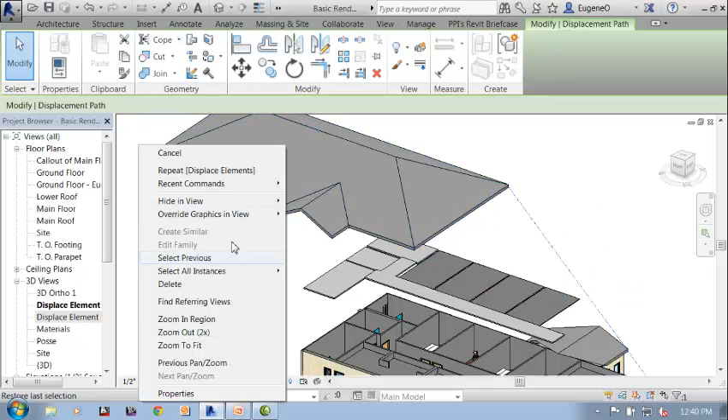Now, while I'm here, let me do one more thing. I can add a path to this, so it shows in the path where it kind of goes. Now if I tweak this like this, I get that. But I can also change on the properties from a straight to a jog as well.

All right, so a part. What is a part? Basically what a part is in Revit is taking an existing family and exploding it. So if I take this wall and say let's make that parts, now it's parts, and I can take these parts and displace them. Now we have exploded assemblies of our stuff.

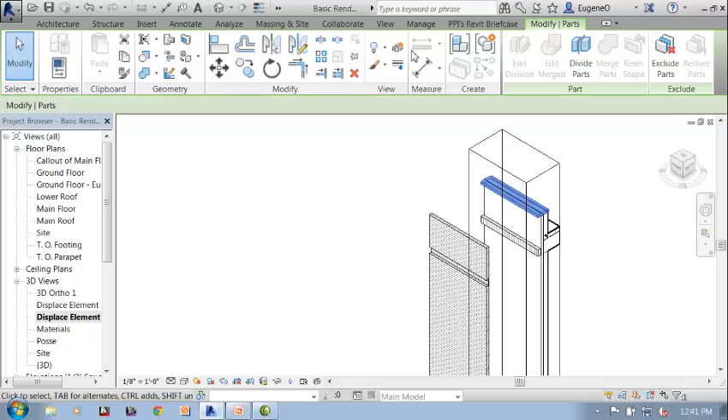Right there. Let's go up like that. Cool? Very cool.

Okay, and then, like I said, we now have the ability, if the view is locked, which it is down here, to add material tags. Very cool.

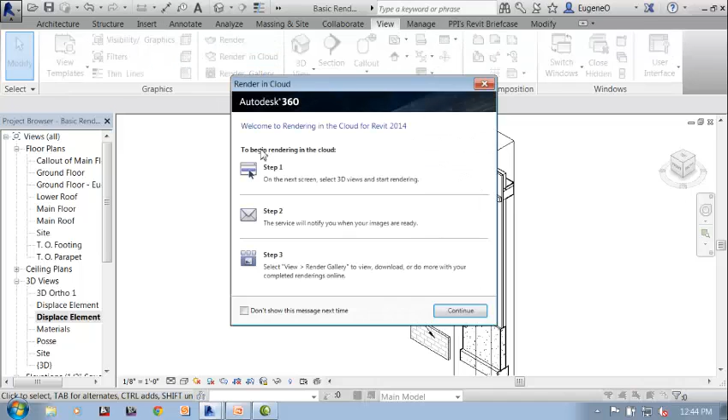So let me do that real quick here. I'm going to go ahead and say render in the cloud. Okay, and then there's that question on it - it's pretty big.

So maximum, a little over 3,000 to 4,000. Yeah, if you pick it, I think it'll show you how many credits - 7, I think I'd do that. I could spare 7, but not for that.